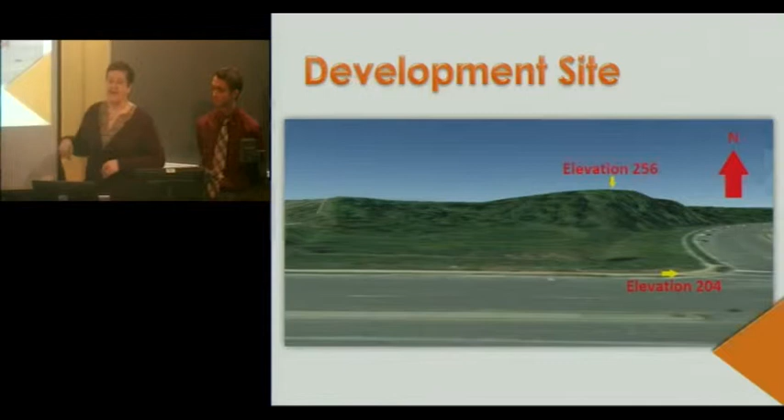One of the characteristics it had was vast changes in elevation. We're looking north from Williamson Boulevard, and the elevation is 204 at the corner of Williamson and Stonehouse, and it rises up to 256 feet. Existing features include utilities, wetlands, and ponds. The utilities shown here: sanitary sewer in green, storm sewer in fuchsia, the water in blue, and electric and telecom in light blue.

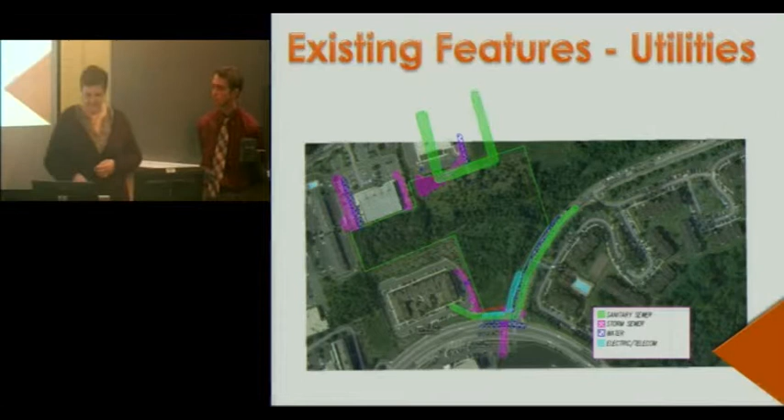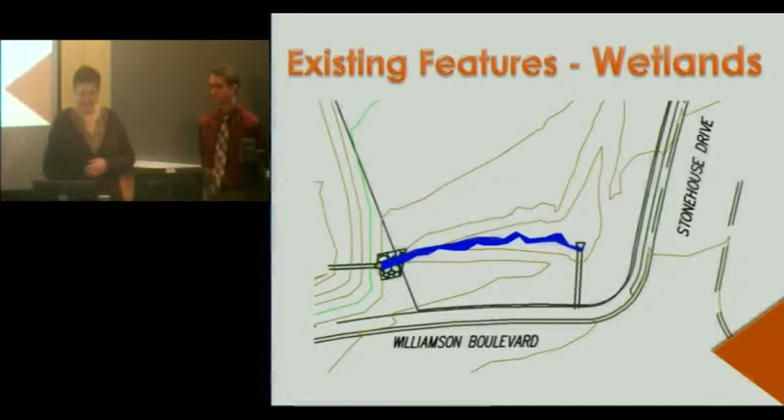There is wetlands on the site. However, it's less than 1/100th of an acre, and a permit was received from the Corps of Engineers to get rid of it. Additionally, there is a retention pond located to the north of our site. It is shared with the office building and will remain.

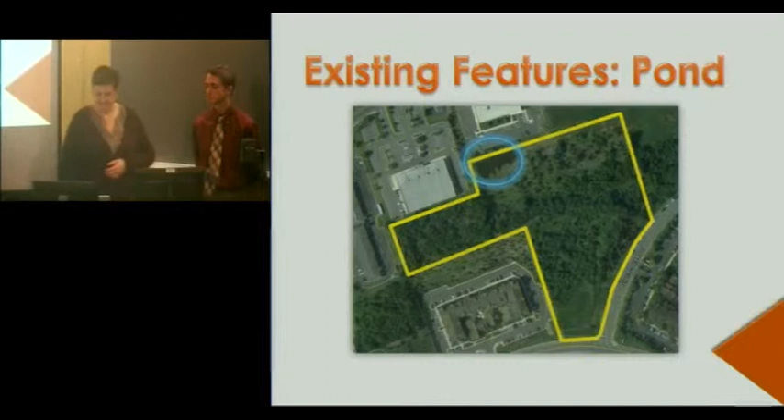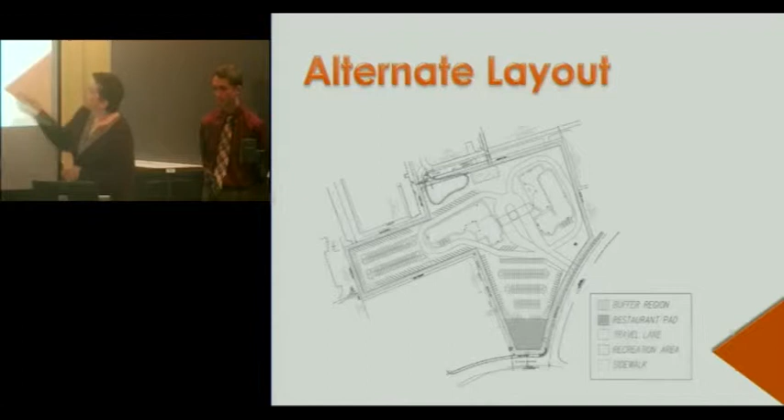Our alternate layout, we found, did not adequately provide parking. The parking for both, there's a long-term and a short-stay hotel, as well as a restaurant pad to the south. The designs for the hotel were given to us. They were plans that were for Hilton. We needed to get the parking around the site, though. So we chose this layout.

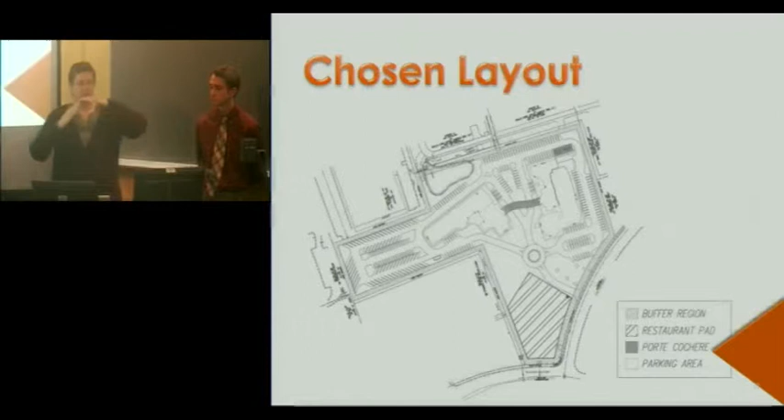By bending the porte cochere, we were able to fit the two buildings better into the site. Also, the restaurant pad size did increase. We also added a roundabout, which is aesthetically pleasing. Chris is going to talk about the grading. Okay.

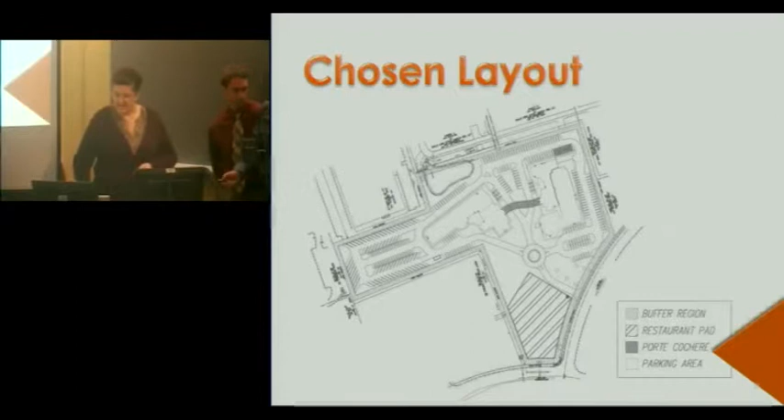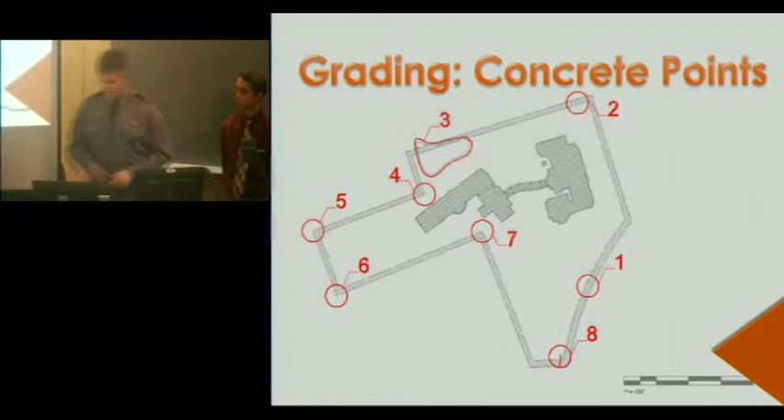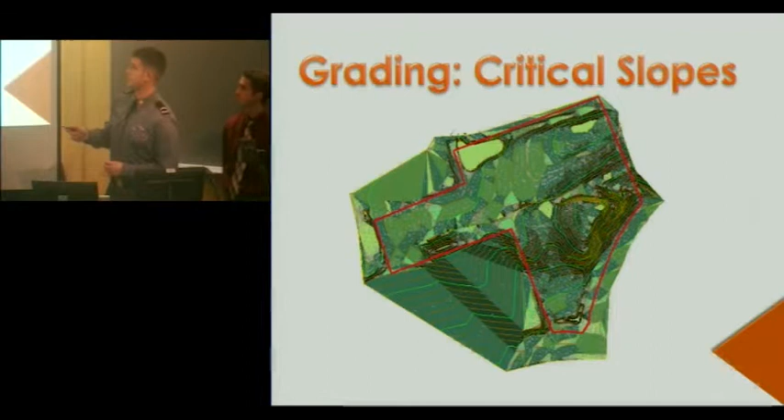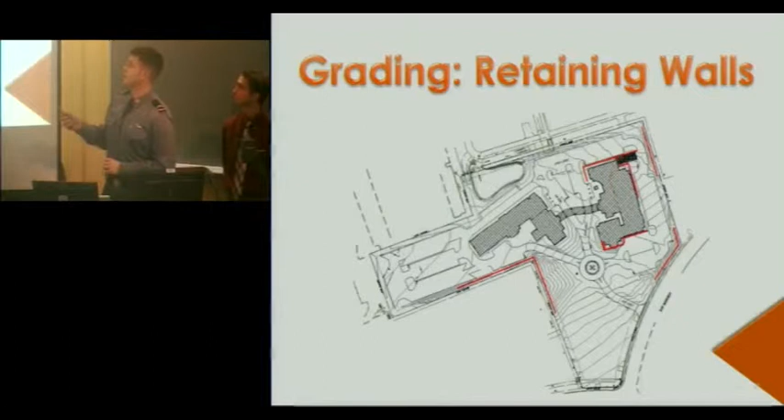This is our proposed grading design, and as you can see over here, the building and roadways are so close to the edge of the parcel that we could not have the standard 3-to-1 lawn slope gradings that we wanted. So we have to put in retaining walls delineated in red. Design speed on all of our travelways on site will be 15 miles an hour, except for the roundabout, which will be 10 miles an hour because of driver unfamiliarity.

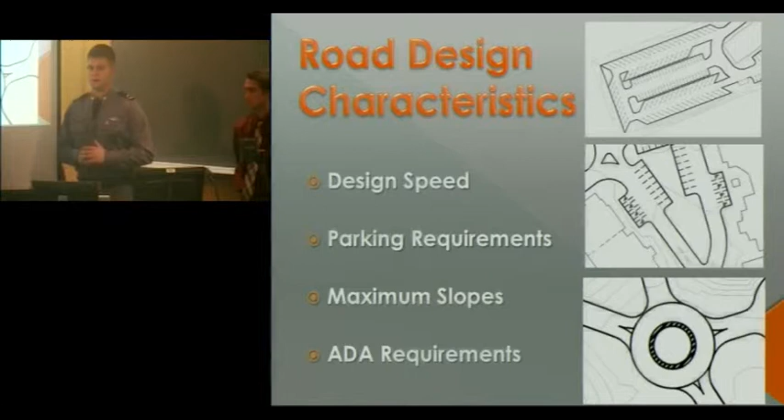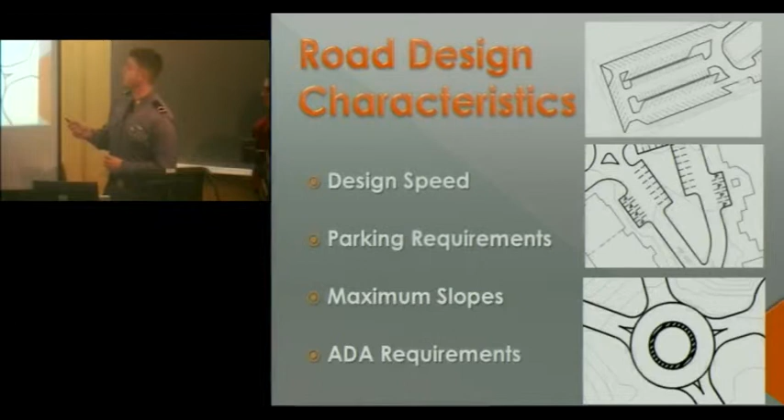Parking requirements. The owner wanted RV parking, so we put it in the very western end of the site. We also put compact spaces on these 2 aisles in the center to decrease the paving costs. We have 308 parking spaces. We need 268 to be required for the 2 hotels. The maximum slopes: we had to max out all of the slopes with respect to the roadway and parking lots. The max roadway slope we had was 10%, and Prince William County says parking lot slopes cannot exceed 5%, but we got a special permit to go up to 6% due to the grading difficulties of the site. And around the ADA requirement, we had 2% slopes.

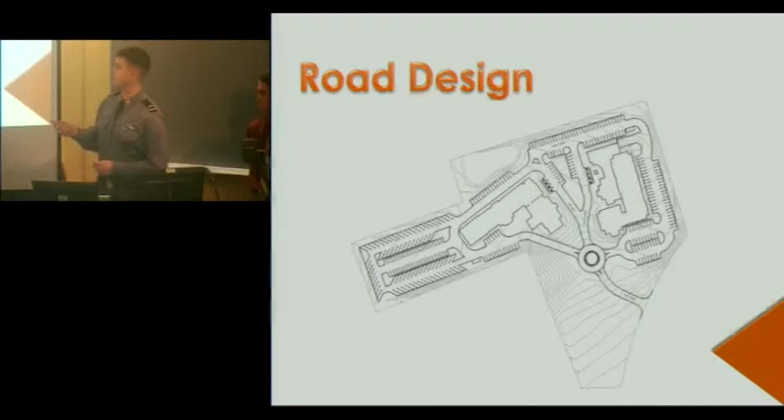This is an overview of the parking lot design. It loops around both the buildings for fire truck access. And this was the main difficulty, getting from Stonehouse to the roundabout. We had to max out this slope because we had to make up grade to reduce the costs.

So as both Chris and Dawn have told you, we had a very unique site as far as the topography is concerned. So as you would imagine, the stormwater management practices would also be very unique. So we did an analysis of both pre-development and post-development flows, and we used the rational method to try to match the two.

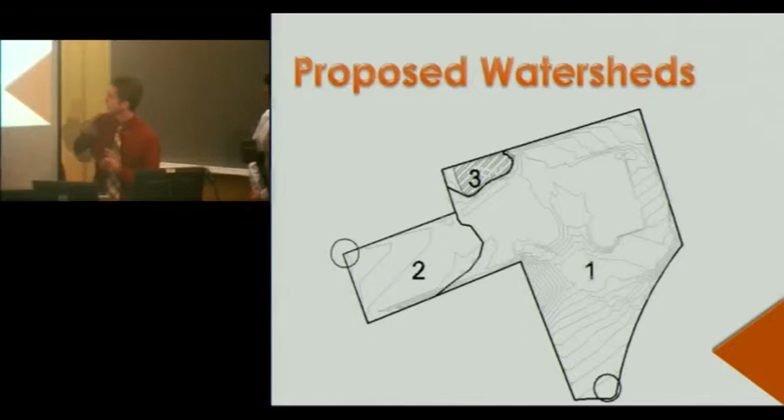2 is still draining to the Bull America property, and as you will see, we have to put in an underground storage facility to help manage that, and 1 is still going to the regional facility, but the pipe here was oversized, and that regional facility can handle large flows, so we didn't really have to worry too much about what we were sending over there.

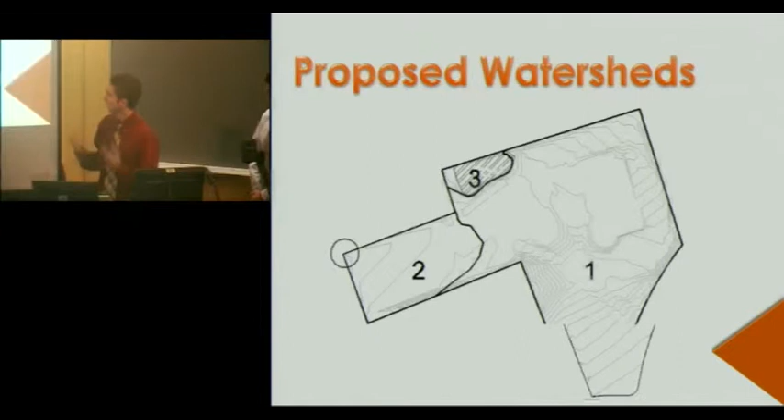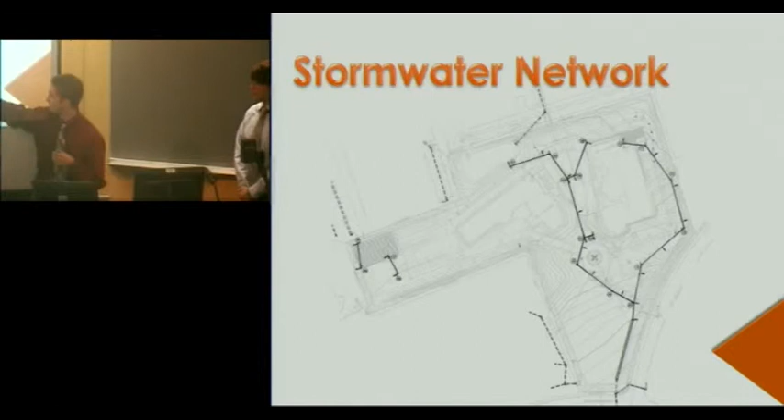Here are the inlets that we proposed that resulted in these watersheds. There were about 20 of them. Here is the actual network. You can see the underground storage facility up to the west. And actually what happens here is this network piping comes down to a stormwater conveyance channel to kind of handle both, to do a little bit of channel routing, to handle the flows, and also to pipe it down to the existing structure down there.

So as I said, we had a management channel and we had an underground storage facility. It came to about 212 holding cells. We also have other utilities, sanitary and water. As you can see, for the water, we tried to increase interconnectivity to increase the pressure in the pipes.

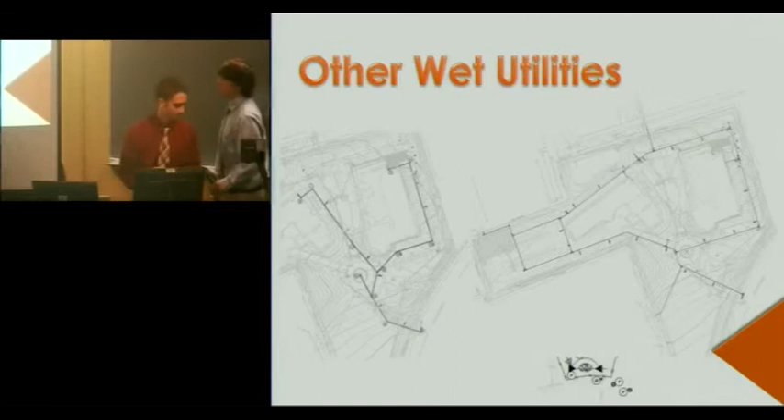As with any construction project, erosion and sediment control is very important. For our site, we are implementing a 2-phase plan. The first phase does begin with surrounding the site with silt fence. We have a construction entrance. You will notice that is not the location of the proposed entrance due to the existing topography. It's just too steep there.

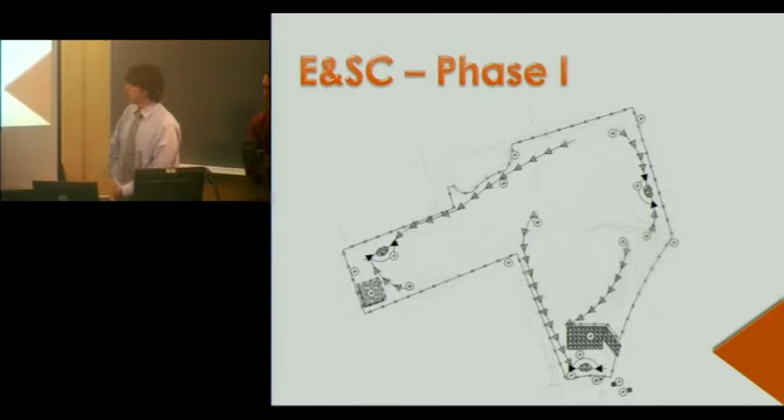We have 3 different sediment traps to capture the water. We chose these over sediment basins for cost, and our site is just about 9 acres. So we are able to divide it so they could handle the flows. We do have some drainage dikes diverting the water into these traps.

And this is phase 2. After we've installed the stormwater, we do have inlet protection throughout the site. You notice the 1 sediment trap is gone, and we now have the underground facility, and we have moved the construction entrance up to the proposed location.

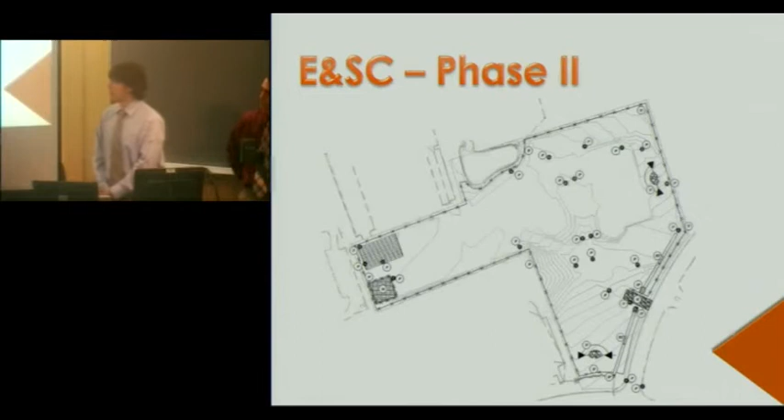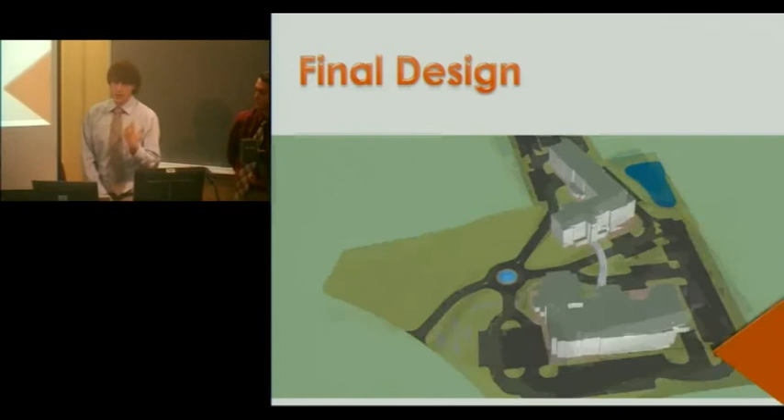This is just an overview of the final design. You can see it is very steep in some areas, as Chris and Will have been discussing. We had to come up to grade very quickly, but we do meet all requirements. This is the parking lot that you saw, and we decided to put a fountain in the roundabout just for aesthetics.

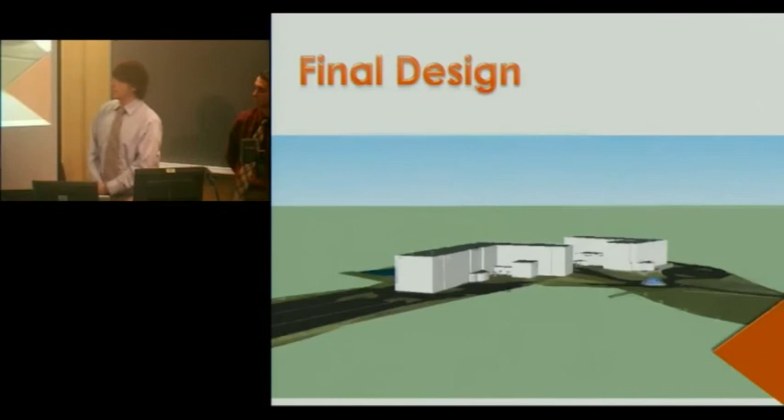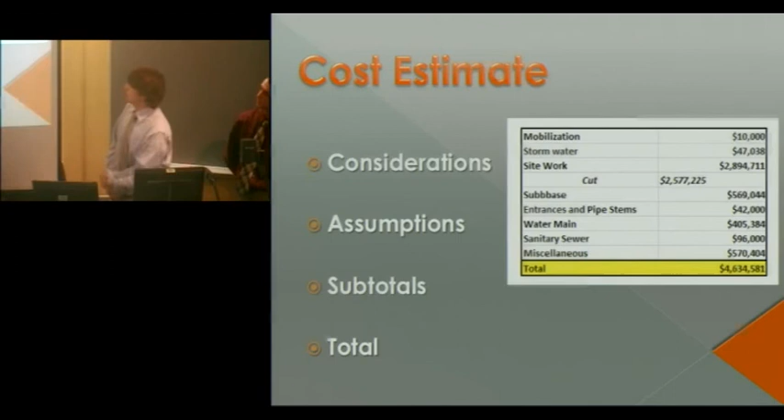In terms of the cost estimate, this is very expensive, but it's not unreasonable considering the unique nature of the site. The cut makes up the bulk of the cost, and this is because we cannot use that undocumented fill. We cannot balance our site because Prince William County has odd regulations which do not allow you to build on soil which is undocumented. So you can see the other large costs, the subbase for the road, the water, and some of the other costs as well are large, but the majority is the cut.

So just in conclusion, the site is feasible. There are some difficulties, but they can be overcome with just some creative design.